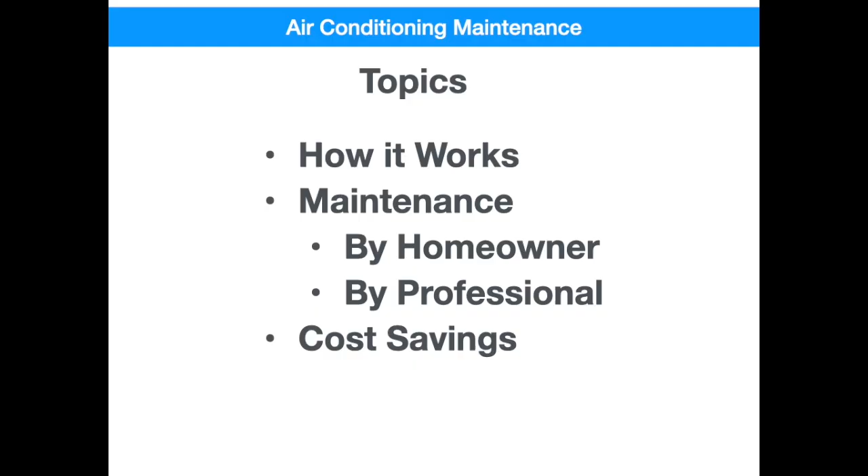Today we're going to talk about your air conditioning system. We'll discuss how the system works, what maintenance you can do as a homeowner, and what to leave to the professionals. I'll also give you a few ideas how to keep the maintenance costs down. So let's get into it.

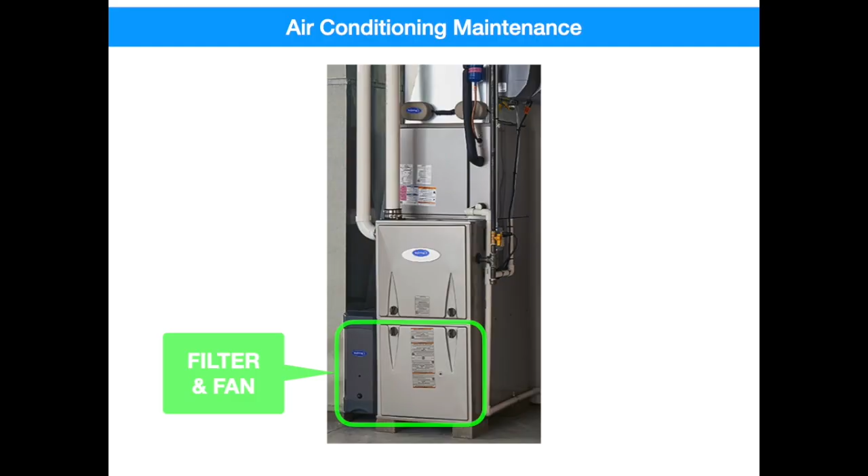Here's your combined furnace and air conditioning coil combined into one package. No matter who the manufacturer is, the house fan usually is on the bottom, with the furnace above it, and if you purchased an air conditioner, the evaporator coil is mounted above that, with the AC compressor located outside.

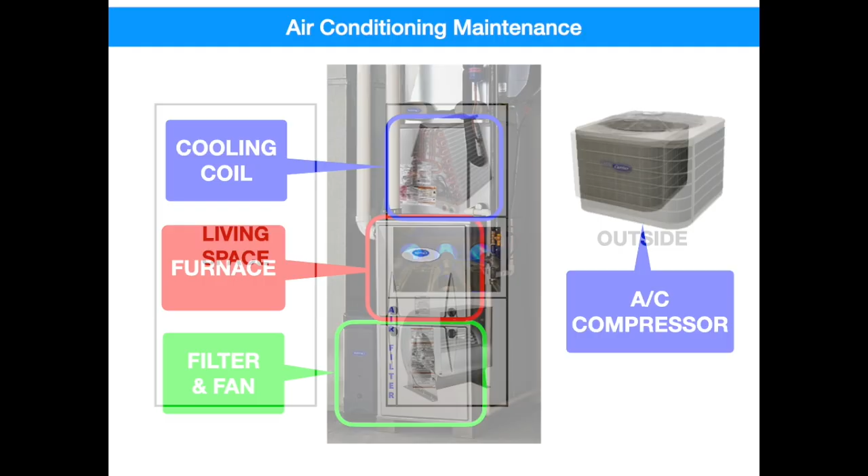So how do these systems all work together? Well, when your house fan starts, your house's air gets sucked into the unit, first through the filter, then through the fan, then gets discharged from the fan and passes through the furnace, then through the AC evaporator coil, also called an A coil because of its shape, and gets distributed back to the vents throughout the house.

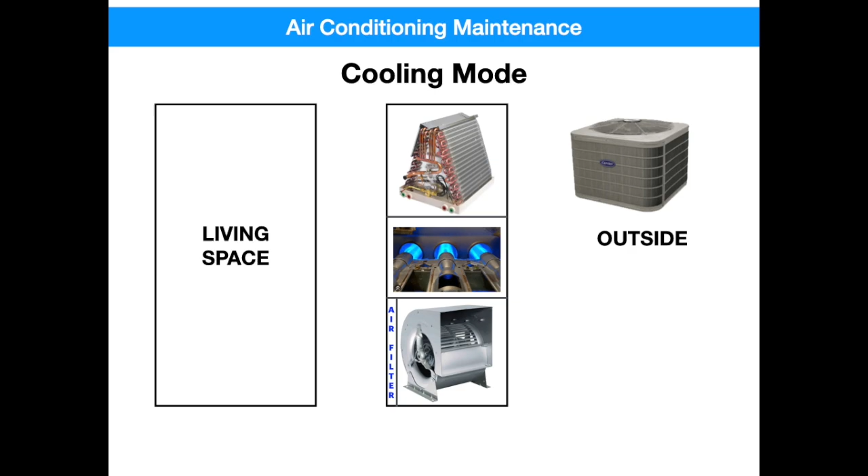Whether your thermostat is set to heating mode, cooling mode, or just fan mode, the same fan and flow path is used for all three. If you call for the heat to run, after the furnace is given time to heat up, the house fan starts, picks up heat from the furnace, and follows the same flow path back to the house. And if you call for the AC to run, the fan starts, gets chilled by the evaporator coil, and continues back to the house as well.

The relationship between the evaporator coil and the outside air conditioner unit can be confusing. Most people think that the air conditioner adds cooling to the house, when in reality, it actually absorbs heat from the house, leaving cold in its absence.

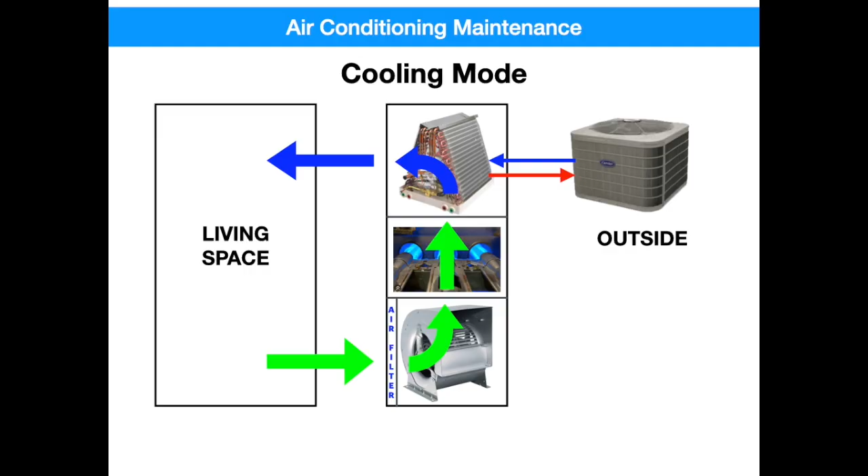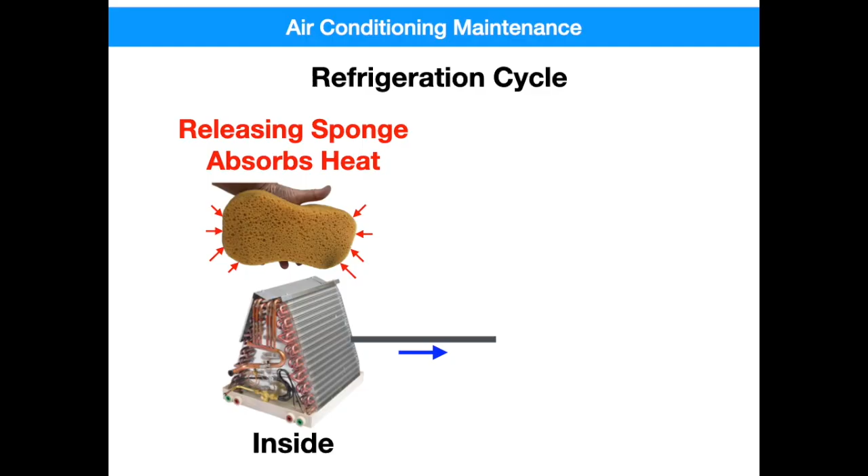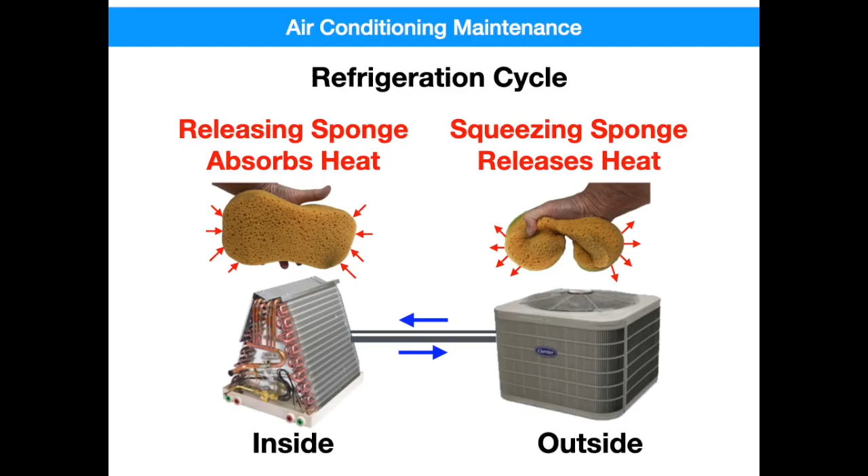Think of it this way. The refrigerant cycling through the system acts like a big sponge. In the evaporator coil, when you let go of the sponge, it absorbs the heat from the house's air. As the refrigerant flows back to the outside unit, the compressor squeezes the sponge and releases the heat to the outside air with the help of the outside fan. Then, the refrigerant flows back inside and the cycle starts all over again. In reality, there's a lot more going on behind the scenes, with the refrigerant gas turning into a liquid and a liquid turning into a gas, but the fundamentals of heat transfer stay the same.

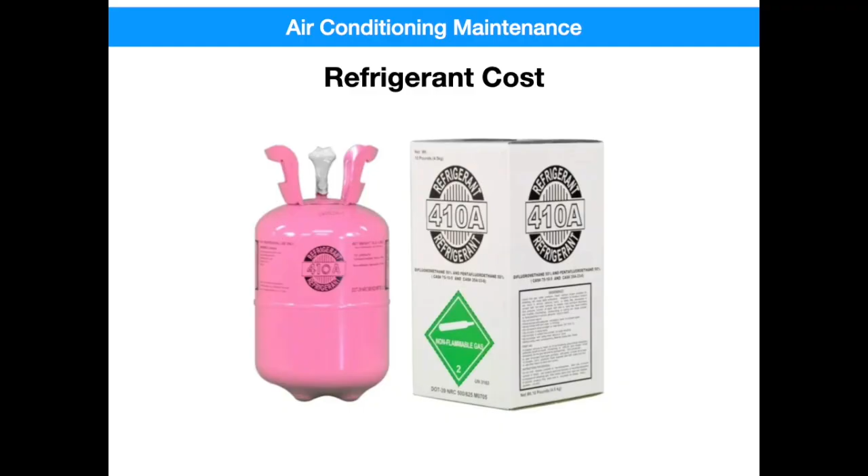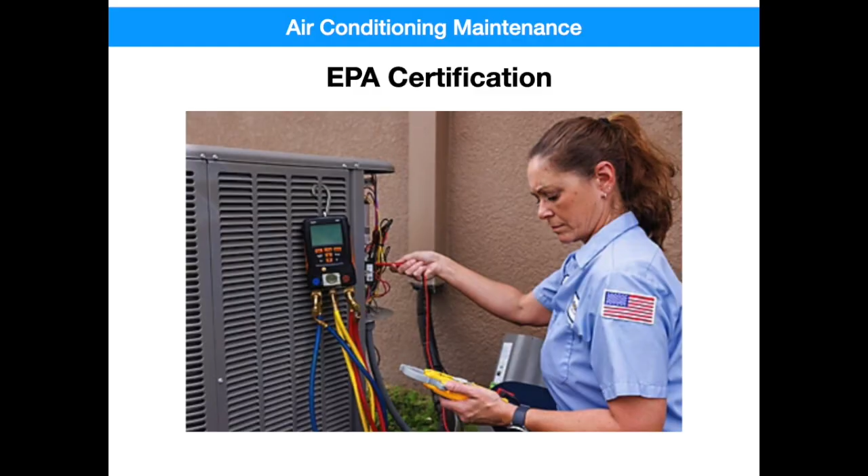This refrigerant I keep mentioning has gotten much more environmentally friendly over the years and also more expensive. Because of EPA requirements, only certified technicians can perform repairs on a refrigerant system. So if you think your system's struggling or underperforming, don't wait to call an AC technician. This could be a sign of a small leak, which can cost you hundreds of dollars in just refrigerant costs alone, and that doesn't include the cost of finding and repairing the leak.

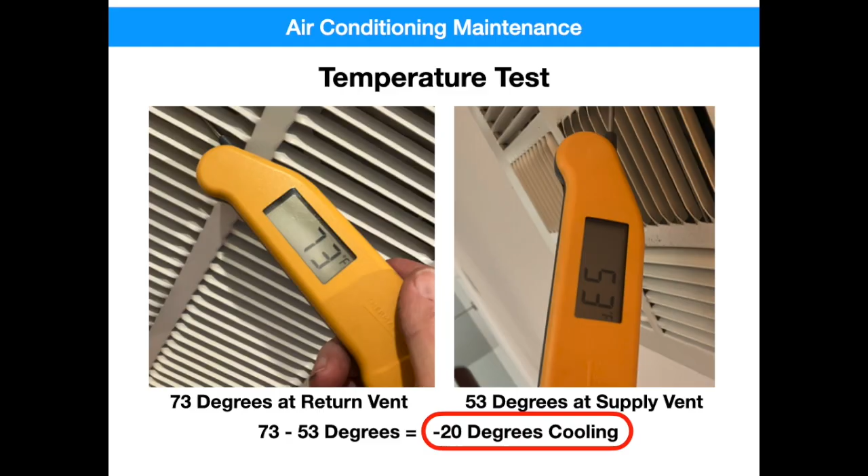So what can a homeowner do? Well, the simplest test is called a delta T test, or a temperature test. After letting your air conditioning system run for about 5 minutes, use a simple meat thermometer and measure the warm air going into the return vent and the temperature coming out of any supply vent. The difference should be between 14 and 22 degrees. 20 degrees is the benchmark, but humidity and your system's airflow can have a lot to do with your number. But anything less than 14 should be investigated.

Here's a breakdown of some other common maintenance tasks homeowners can do. Replace or clean air filters. That's probably the most important task. Inspect and replace them at least every 3 months, and more frequently depending on if you have pets, allergies, or your system constantly runs. And here's a tip: if you can't see through the filter, it's time to replace it.

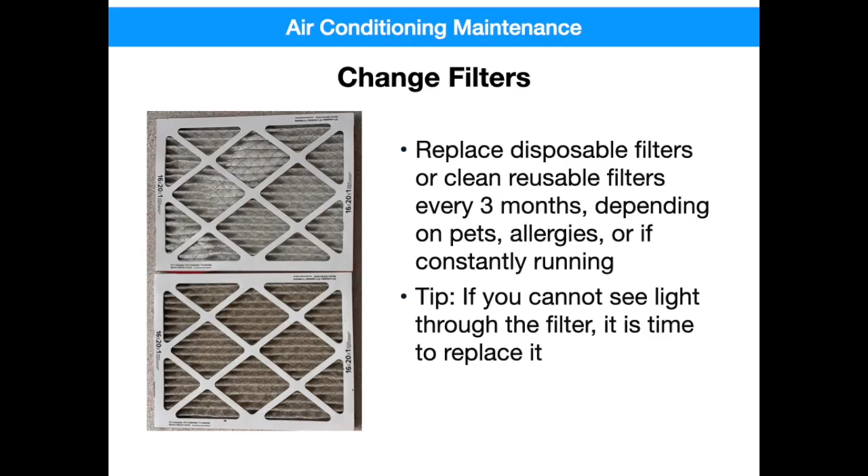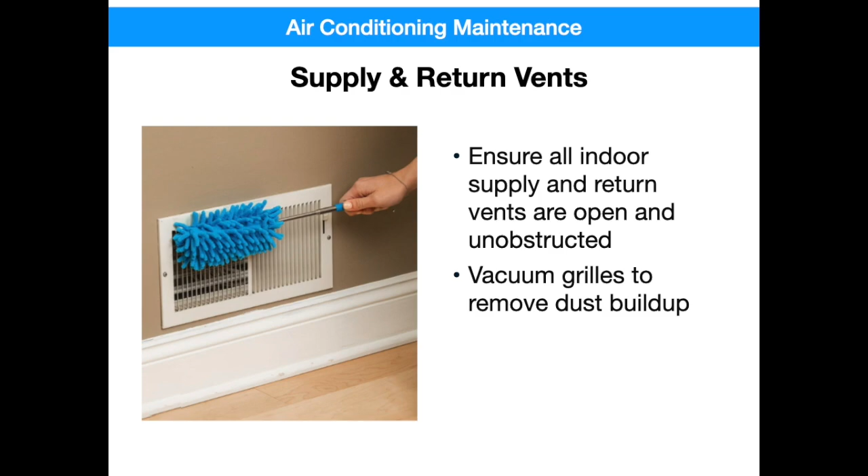Here's a simple one. Ensure that the supply and return vents are all open and unobstructed by furniture or rugs. And then be sure to vacuum the supply and return grilles to remove any dust buildup.

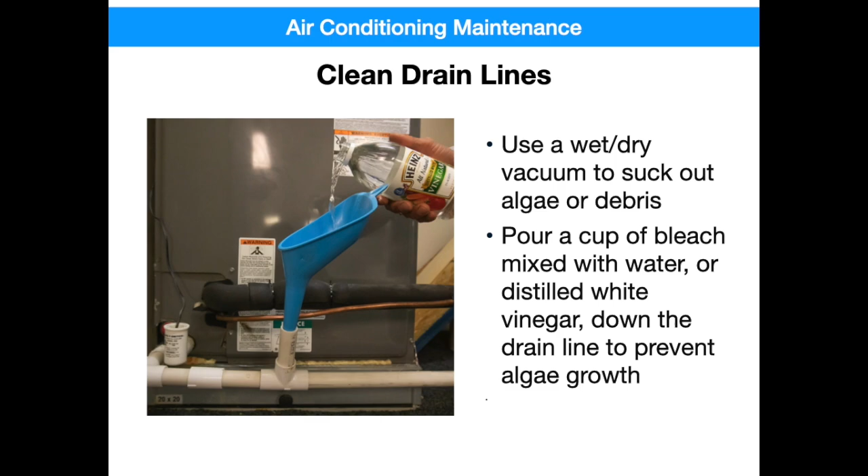It's almost certain condensation will be created by the air conditioner. This condensation drains away, typically outside or to a floor drain. You definitely want to keep this drain path clear. To do this, locate the white PVC drain line and check for clogs. Use a wet-dry vac to suck out any algae or debris from the end of the pipe. If it's really bad, pour a cup of bleach mixed with water or distilled white vinegar down the drain to prevent the algae from growing.

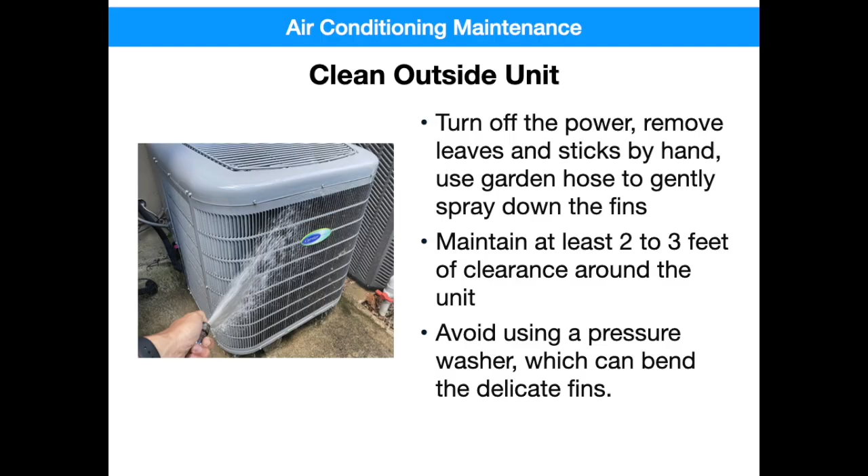Next, we'll talk about cleaning the outdoor unit. Turn off the power and remove debris like leaves and sticks around the unit, and use a garden hose to gently spray down the fins. Maintain at least 2 to 3 feet of clearance around the unit, trimming back shrubs and foliage to ensure proper airflow. And lastly, avoid using a pressure washer, which can bend the delicate fins and block airflow.

Since you're outside, check the insulation on the bigger copper refrigerant pipe leading from the compressor unit to the house. If it's crumbling, broken, or missing, replace it to maintain thermal efficiency. You can buy replacement covers at any big box store.

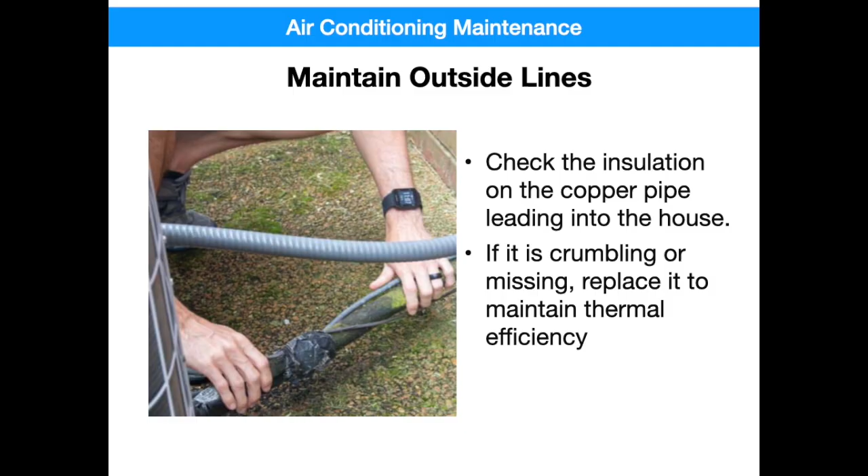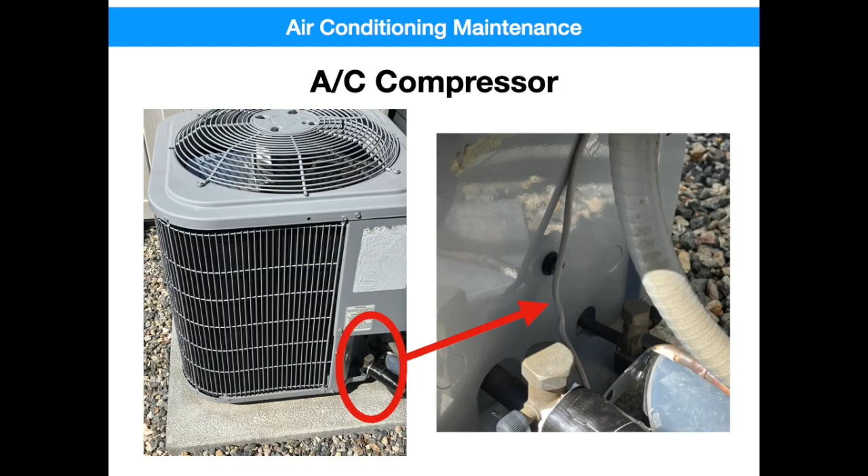It's always good to be on the lookout for rodents around your house, especially around the low voltage small wires going into your AC unit. Rodents can stop your air conditioning from working with just a few bites. And since we're talking about pests, you should periodically inspect your entire house for wasps' nests. It's not uncommon for them to build a nest in your AC compressor units or in the electrical safety switch on the wall connected to it. But never try dealing with them without first turning off the power.

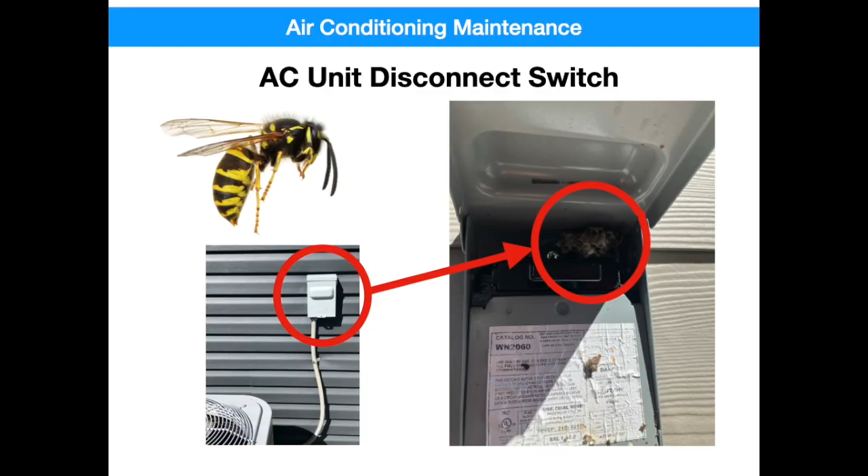Now let's talk about the work you should leave for a certified air conditioning contractor.

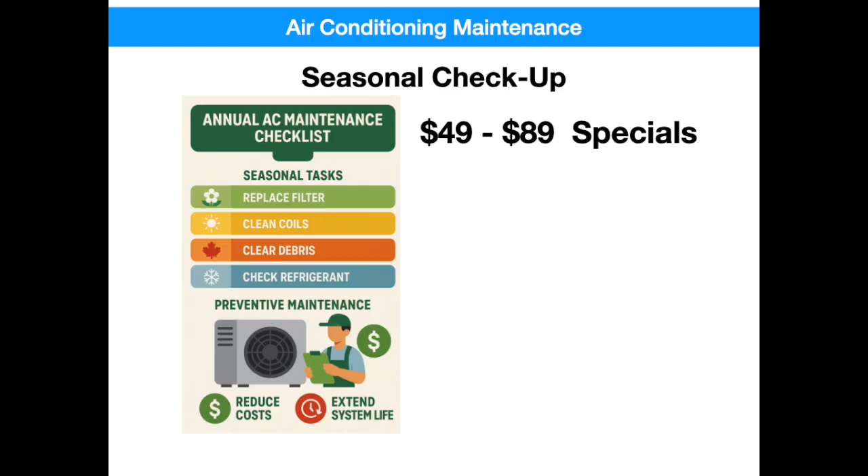One of the best deals for your money are the seasonal checkups that companies offer for spring and fall. For under $100, air conditioning professionals will come in and go over your system with a fine-tooth comb, looking for issues inside and out, and present you with a write-up of what they found. These checkups are cheaply priced to get their foot in the door in hopes of immediate or future repairs. The checklist is yours to keep, and you can always call on another contractor to verify their findings or compete against their repair costs.

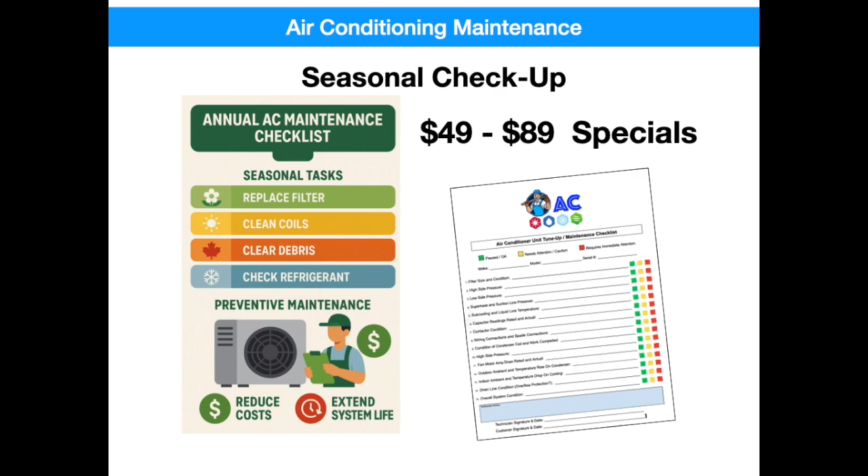Work on the Freon system, compressor, A-coil, or fan motors is absolutely better suited for an AC professional.

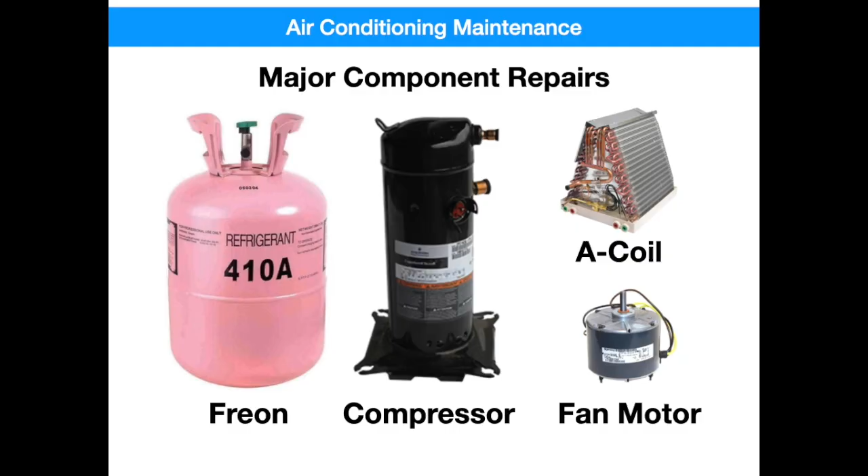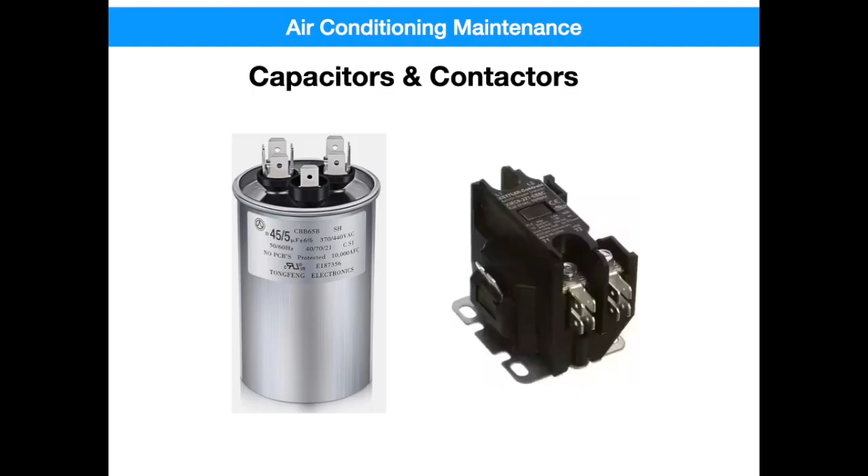The next two items are the weak links of the AC system and are frequently identified as failed or out of tolerance. They are the capacitors and contactors.

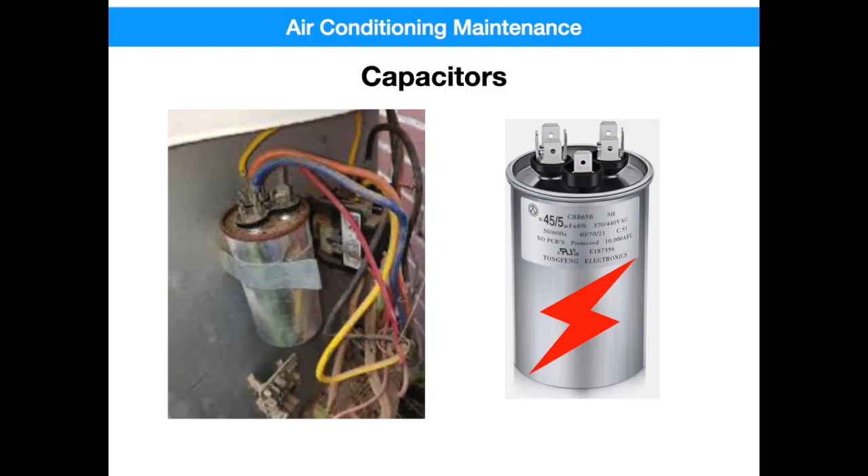The contactors are fairly simple devices that do wear down over time as well. The way they work is when the thermostat calls for the AC system to start, it energizes a magnet on the contactor and sucks in an electrical contact, completing the circuits to the fan and the compressor.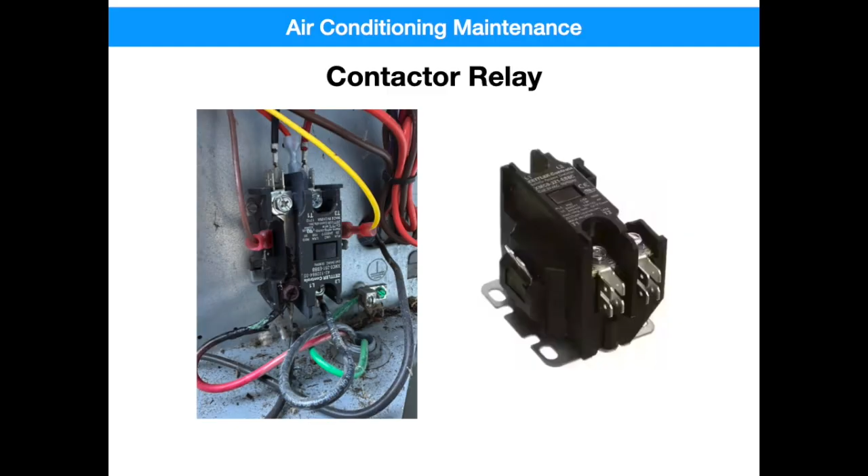The savings opportunity here is that these two devices cost very little, as you can see, but they are by far the two highest marked up items to have replaced. Once you burden these prices with the high costs of diagnostic fees, truck overheads, training, office costs, and labor markups, the all-in cost of these repairs can be 6 to 7 times the cost of the device. These capacitors and contactors are not part of the Freon gas system, they're just part of the electrical system that starts and stops the fans and compressors. My recommendation is to use a local electrician or handyman in the area to purchase the part and do the work at half the cost.

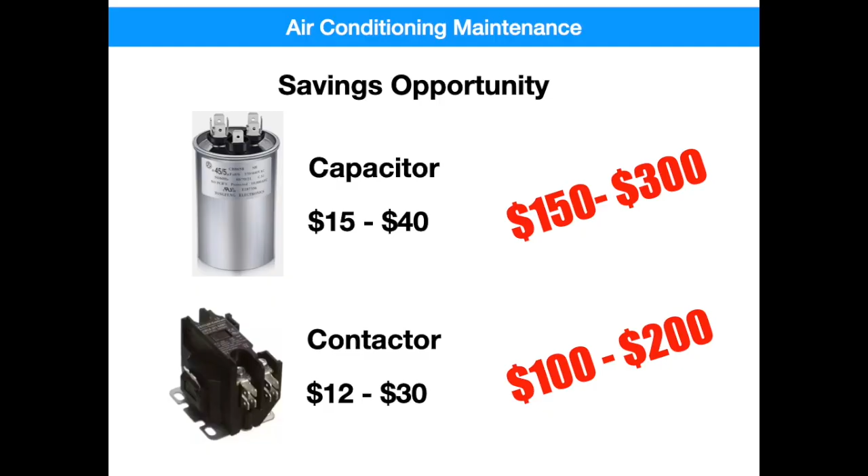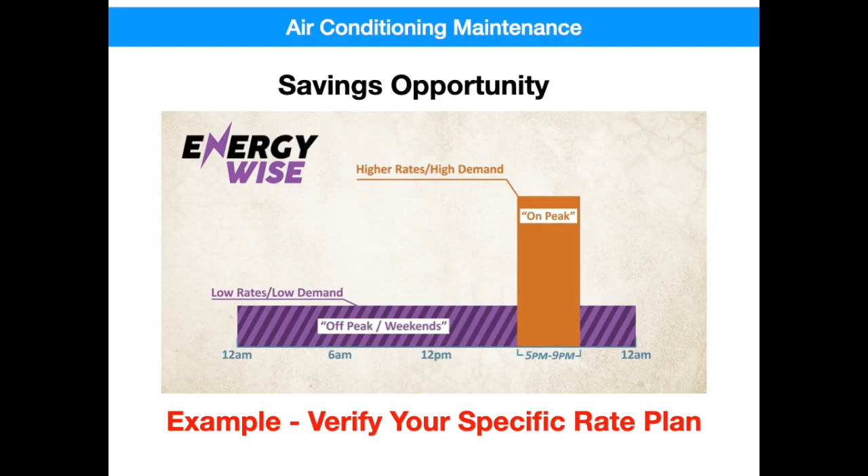The last savings opportunity is a good one, and it has nothing to do with parts. It's to understand and take advantage of your utility's rate plan structure, and know when and not to run your biggest appliances, especially since the cost of a kilowatt hour can double during peak periods. The homework here is to bring up your electric bill and see what rate plan you signed up for, then go onto your utility's website and see what days and hours you should avoid. Once you figure it out, print it out and post it in a conspicuous place for all to see. You'll be delighted with the outcome.

Well, hopefully this helps give a better understanding of your air conditioning system, and as always, feel free to get a hold of me by leaving a comment.